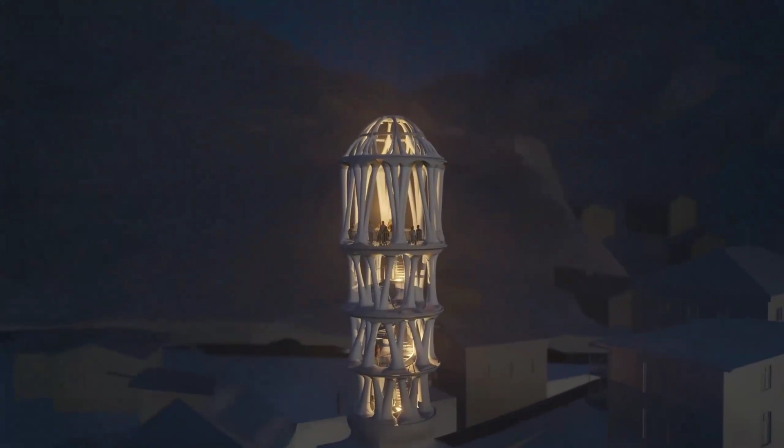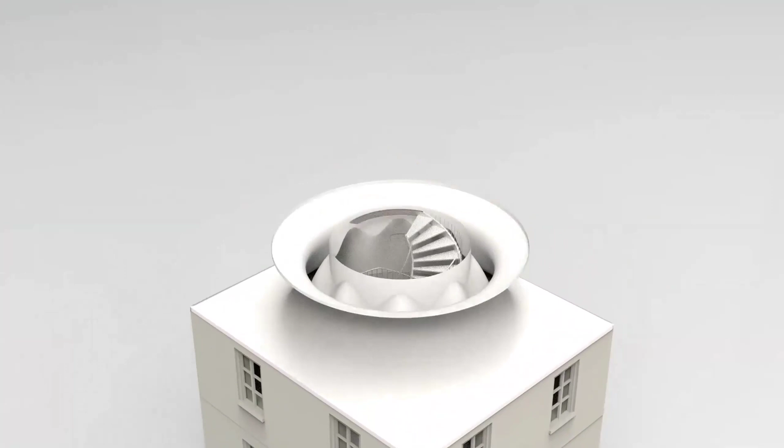So Tor Alva is a four-storey, 30-meter tall, 3D concrete printed tower located in Mulegns, Graubünden. The visitor will be able to enter from an existing building below the tower and walk up this spiral staircase to a platform on the top level. And the space can be used for observation and hosting cultural events on the top level.

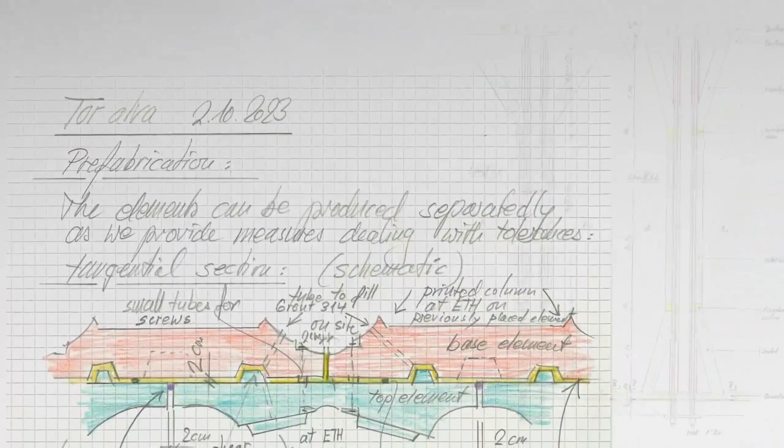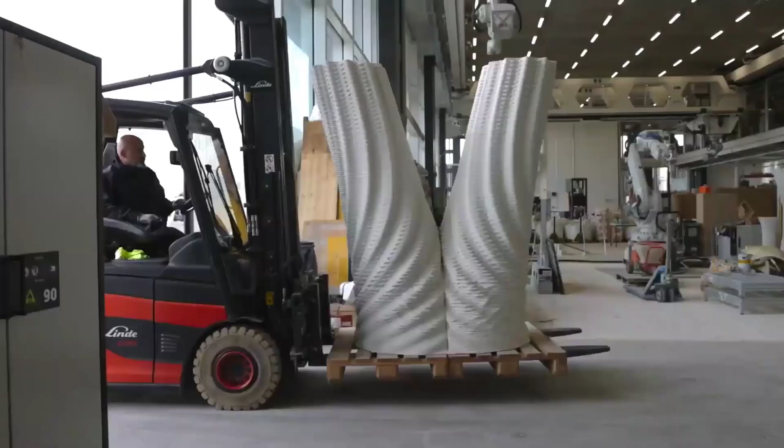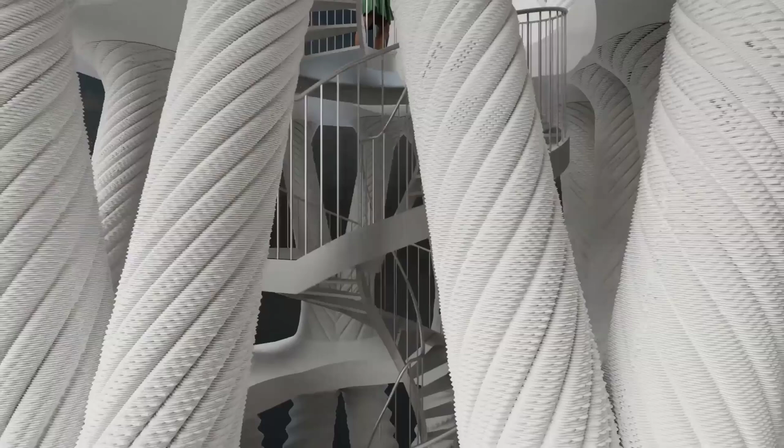The project was inaugurated basically 1 week ago. And the last time I checked, it is still the tallest 3D printed concrete structure in the world. Yeah. So all the components are fabricated and sent to the assembly hall, but basically all the printed parts are done in RFL. Exactly. This is the spiral staircase.

All right. So this project was initiated by Nova Fundaziun Origen and designed together by Professor Benjamin Dillenburger, architect Michael Hansmeyer, and Conzett Bronzini Partner as a structural engineer. The development of the technology was collaboratively done by Digital Building Technologies with Dr. Ana Anton on the 3D concrete printing fabrication, CSBD led by Professor Walter Kaufmann on structural engineering, and PCBM led by Professor Robert Flatt on material engineering.

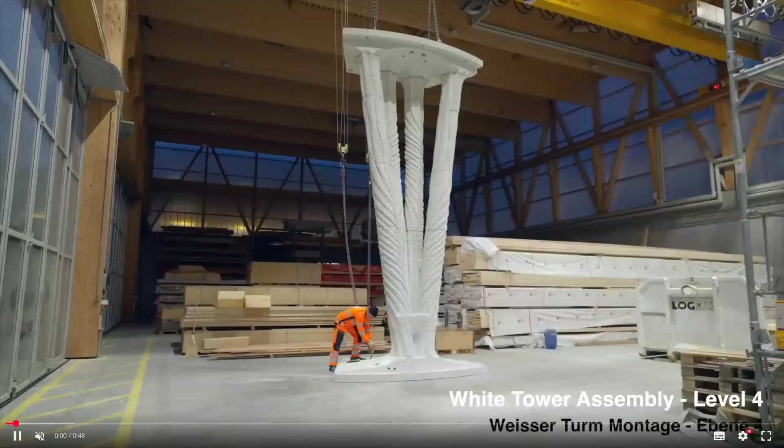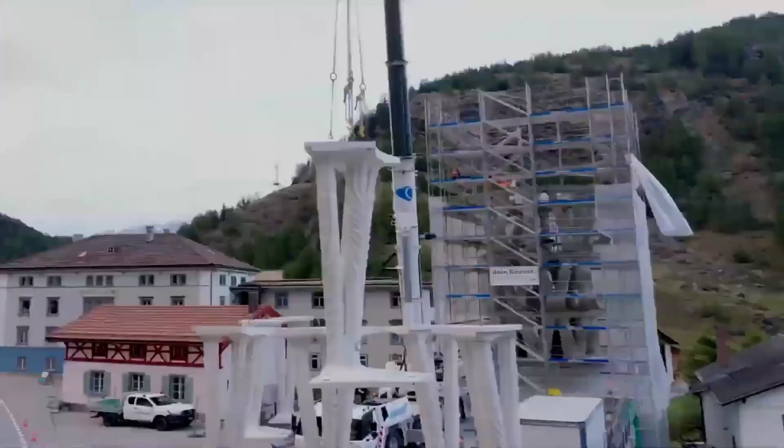Also, this project is partnered with ETH spinoff Saeki AG for 3D printed concrete formwork and Mesh AG for the rebar reinforcement integration. Depending on the different levels, the height of the columns varies from 2.2 meter to 6 meter. These elements are assembled in Savognin, the assembly hall we have 15 minutes away from Mulegns. Later they are transported on site and stacked by a designed dry joint connection, ready to be disassembled and reused in the future. So this is the crane.

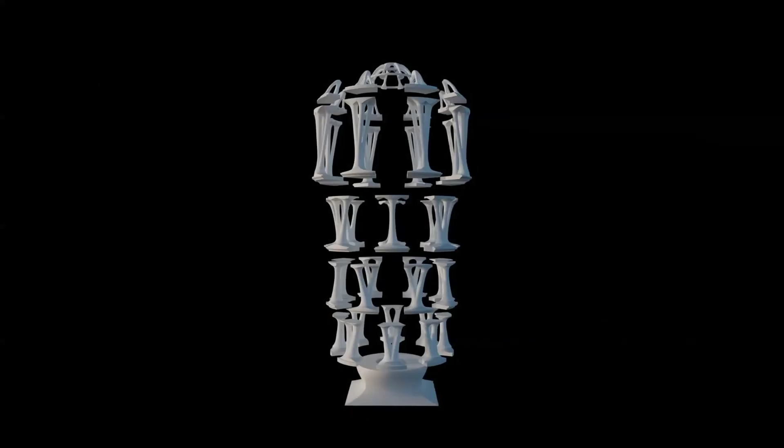The printed columns are joined together with the cast base and capital as a single element after inserting longitudinal reinforcement and grouted. And the image is one of the formworks that was used in the cast capital. And this formwork was also manufactured with 3D printing technology by Saeki. The tower is composed of 48 of these elements. Each column is further segmented into 3 to 13 pieces, depending on the height of the columns, with a print height of 8 millimeter.

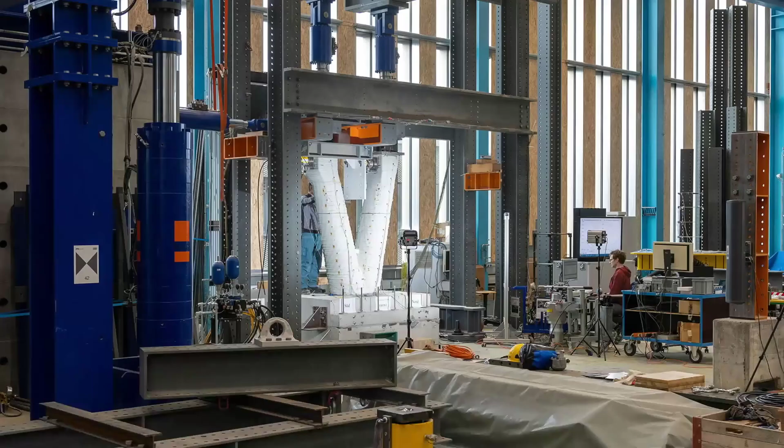210 kilometers of print path was printed in the Robotic Fabrication Lab in ETH Zurich within 6 months. These branching columns are designed as load-bearing elements in the structure. Additional structural tests are performed by CSPP to further investigate the compression and the tension performance of the columns.

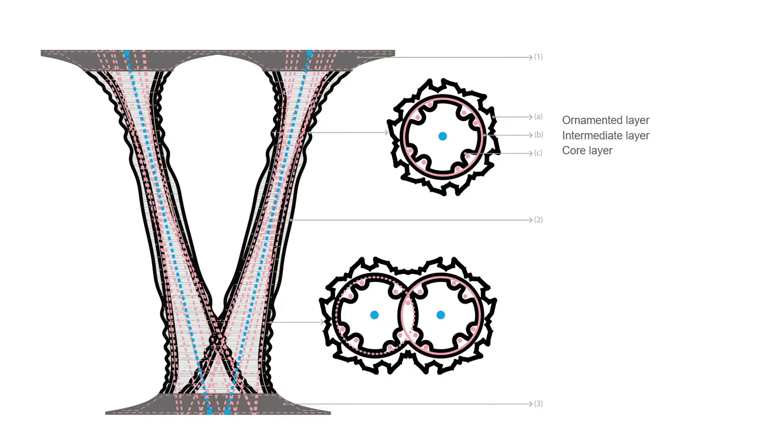All the print paths within the design of the tower are combined by 3 layers: the ornamented layer on the very outside, to address the material-driven ornament, the intermediate layer, and also the core layer that forms the channel for longitudinal reinforcement.

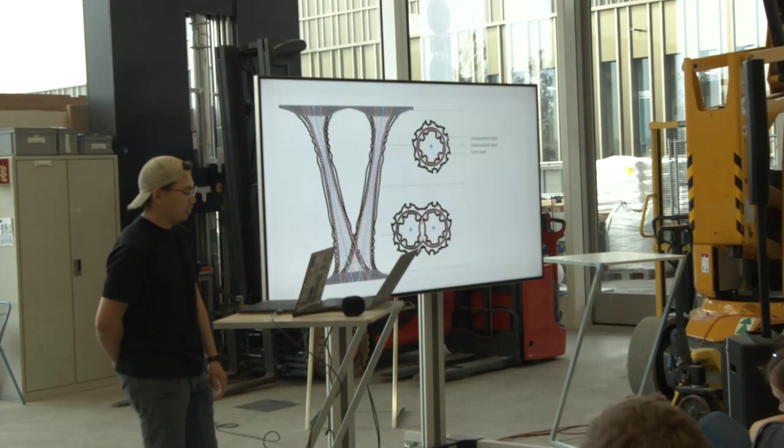All these print paths were generated with a numerical function that described the position of the point on the column in a polar coordinate system along the central axis of the columns, the blue one you see in the image. We designed the system this way so that the geometry can be recreated anywhere, also outside of Rhino, for example via COMPAS, and so we can utilize the supporting packages that come with the COMPAS ecosystem.

The 3D printing technology shows its advantage while fabricating these V columns, these branching columns. Intersections of these branches can be nicely handled with the print path design, and in order to manufacture these load-bearing columns, horizontal reinforcement was inserted during the printing, as you can see on the left, and the longitudinal reinforcement was inserted after all the printing is done into these designed channels and grouted. The rest of the columns remains hollow to minimize material usage and ensure material efficiency.

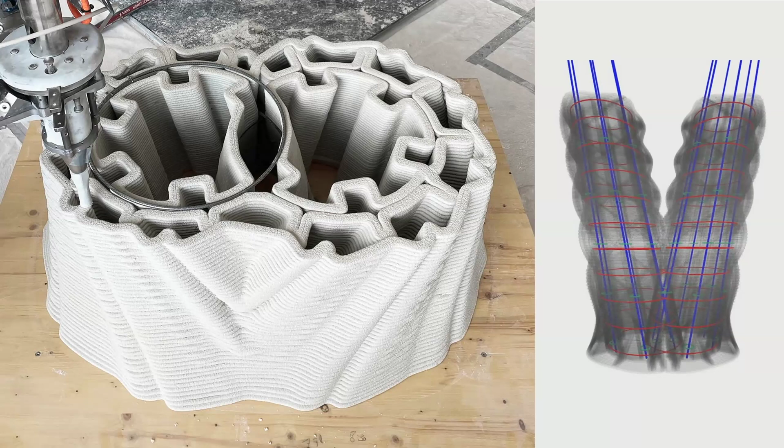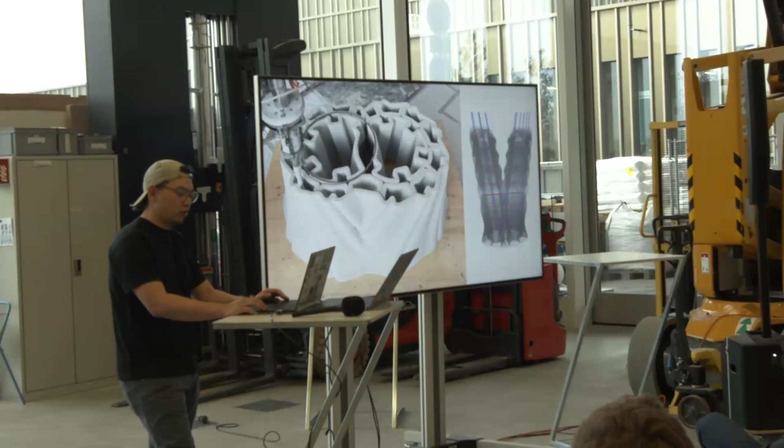The horizontal reinforcement were allocated every 20 centimeter. So this and the next 20 centimeter will have another one shifted between branch, so the reinforcement won't collide with each other. So basically in the whole column, the reinforcement layout is like on the right.

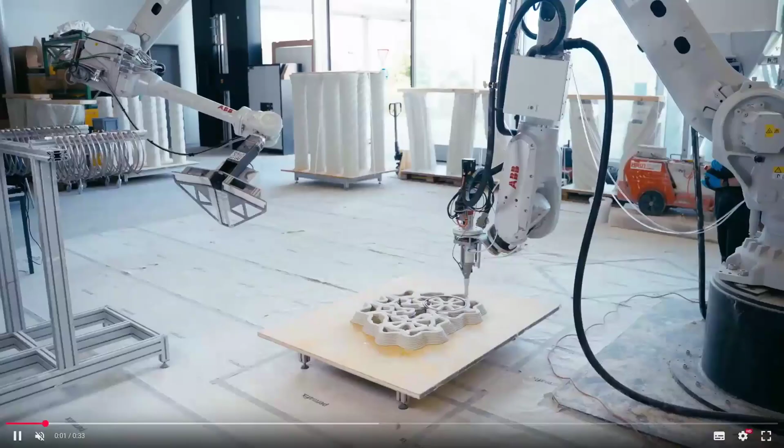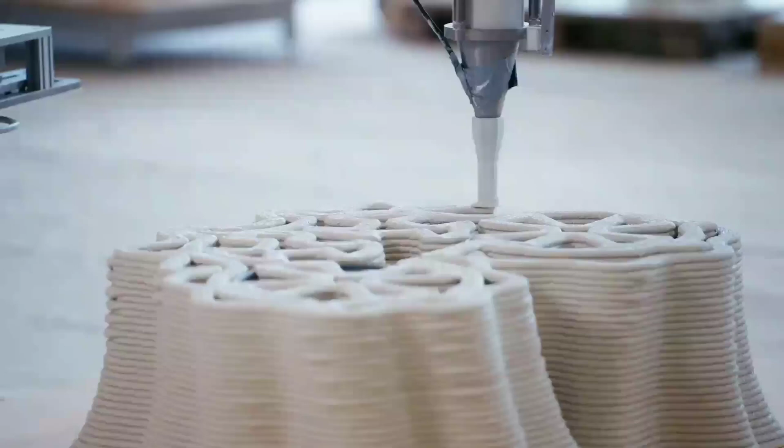Together with Mesh AG, we developed a fully automated process for the rebar integration. 2 robots work collaboratively during the process. One is printing the concrete, of course, and the other one is picking and placing the rebar into each branch when the layer is reached. Yes.

So with COMPAS RRC, it makes it very easy for us to embed the additional information of the reinforcement to each robot target, and it informs the picking robot which diameter of the ring it should pick up, on which rack, and on the target layer which the reinforcement is needed.

The placing robot can sense the position and velocity of the printing robot through feedback and actuate itself at the right timing to avoid collision between 2 robots.

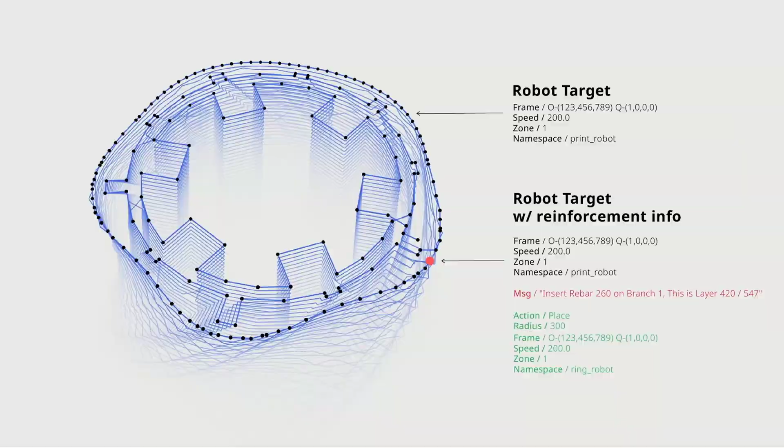But yes, all the glory, but of course we didn't start from that. We start from this. As you can see in the image, one of us is holding the pendant, the other one is holding a rebar ready to place it into the print. We have to position and press the ring slightly into the print, and of course, avoid hitting the robot.

Since the core of the columns are not cylindrical, the diameter of the rebar rings alters. We designed this rack in a very manual way to sort the rings in order regarding the position of them in the columns, pick them up one after another through the printing process.

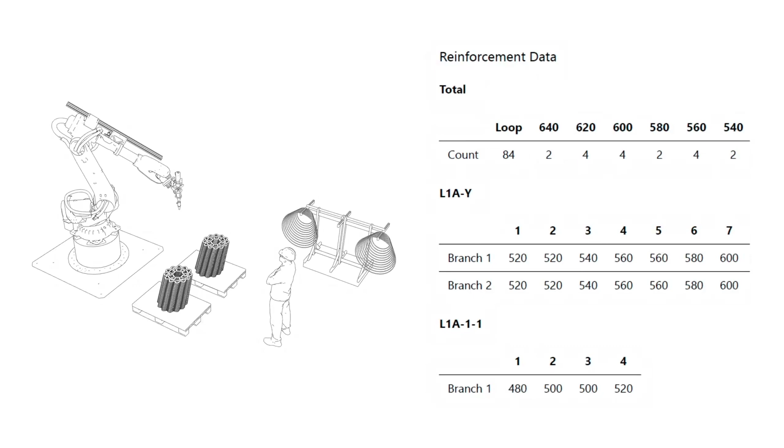But still, there's this problem of when is the right moment of placing these reinforcement. We cannot count these layers that we have printed to determine when to put the rebar. So the robot has to speak. "Insert rebar 480 on branch 2. This is layer 55/249."

So we added a text-to-speech engine to our production code while executing RRC commands. When the robot reaches a certain target that is predefined, the speaker will play this information to the operator: where and which branch to put the rebar, and also how many layers we are away from ending the printing day.

Knowing how we can utilize COMPAS RRC to solve our problem during fabrication, we are able to integrate this additional information during the design phase. So while planning the print path, we also plan this reinforcement information, packed together and executed by the production code we have. This red part, the additional text-to-speech engine, is added to the loop to auditorily inform the operator when to insert the reinforcement.

Surprisingly, for the automation of the rebar, things are not so different from previously. Instead of activating a text-to-speech sequence, all we have to do is launch a different sequence that sends robot instructions to the second robot. The flexibility provided by RRC makes it very easy for us to integrate this workflow without major changes to the pipeline we have. That is also why we are able to improve our workflow during the production of the actual columns.